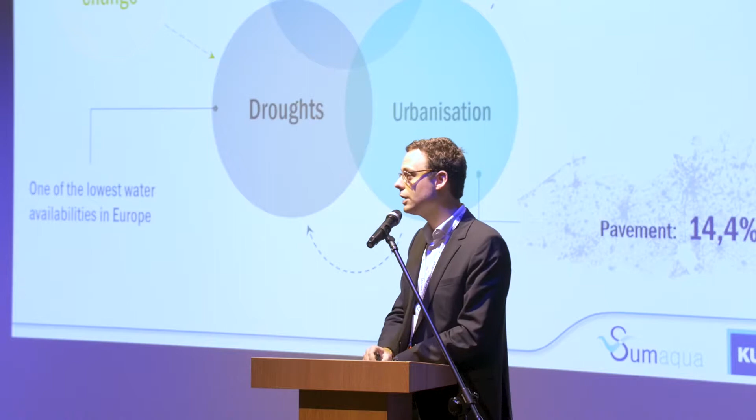And on top of that, we also have climate change, which further increases the risk of floods and droughts, of course. So we have to do something about it, and we want to build water-resilient cities in Flanders. And for this, we need to go for a lot of different strategies. We have to use adaptive infrastructure, of course.

We have to go for win-win uses of open spaces, so multifunctional buffers, smart systems, as also introduced in the previous presentations. But we also need software and decision support systems to create strategic planning. And that's where the software that we developed comes in, so Sirio and SCAN. So that's basically the framework.

So first, let's look at Sirio. Sirio is a software tool that we've developed to design climate-proof and optimal small-scale rainwater systems like buffer basins, for instance, or infiltration basins. But the unique thing about this is that it simulates long-term time series. So we're going to simulate hundreds of years of rainfall in just a few seconds. I'll explain that in a minute.

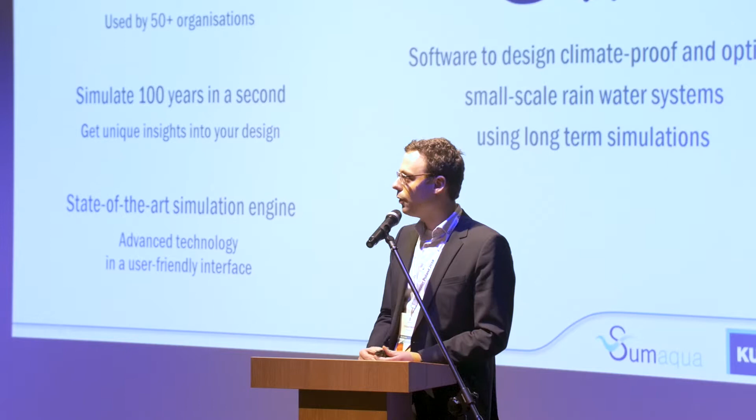So we've developed this at the university in Belgium, and in 1 year, because it's launched about a year ago now, it has become the standard tool for small-scale rainwater designs, and some companies here are in fact also using it. And as I said, the unique thing is that we can simulate 100 years of rainfall just in a second. So that's very easy to do. And then we can learn a lot from those data. We can do that because we've built a new simulation engine, which is very fast.

Now, how can we use Sirio for some practical cases? We can use it for sewer designs, for instance. So we can determine how much buffer volume we should design, how often an overflow is going to occur, and so on. But we can also use it for rainwater harvesting analysis. So that's basically reusing rainwater. And that's becoming increasingly important and also increasingly applied in Belgium.

So we can determine very precisely how much water is available and what the optimal design should be to maximize the potential water reuse. We also use it for strategic water planning, so for industries, for instance, to create some water plans, also for cities. Brussels Airport, for instance, is also using it, and for climate adaptation. So we've built several climate change scenarios into the software, so you can also simulate those. And then you can see what's going to happen in the future with your specific design.

How does it work precisely? I'll also show you an example in just one of the next slides, but I'm briefly going to go through the different steps. So the first step, you have to build your Sirio model. So you have to translate your design into some parameters in Sirio. I'm not going into technical details because that's not the point of this presentation, of course. But it's very easy to build such a model. So it's basically a reservoir type model and all the parameters are tangible, you can measure them.

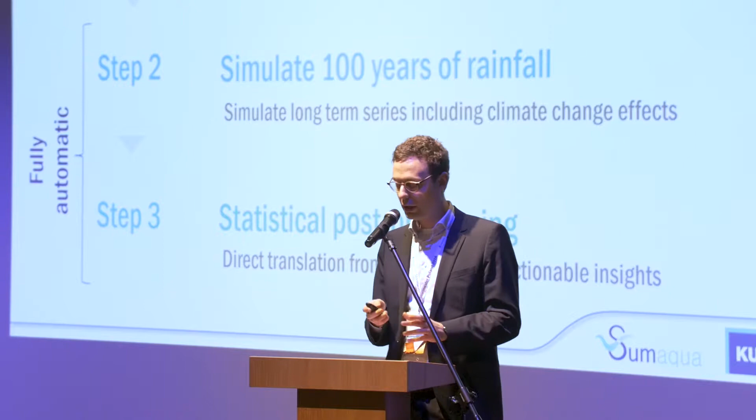So what can we learn then from Sirio? Because of these long-term simulations, we can get a lot of insights. We can look at the mass balance, for instance. So how much water is going to infiltrate, how much is going to evaporate, how much is going to reuse, and so on. All the overflow characteristics from an event that occurs 20 times a year up to an event that occurs only once every century are directly visualized. Climate change impacts are also visualized, including the uncertainty, of course, rainwater harvesting analysis, and a lot of additional information into the dynamics of your system. But I'm not going to show that.

So let's go to an example. This is a new residential zone which is currently being built in Ghent, a city in Belgium. And we received a design from a sewer company, from an engineering company basically. And the design included some infiltration ponds, green roofs, buffers, and so on. So we were asked to evaluate that design and to check whether it's sustainable or not and if it could be improved. Now, unfortunately, I cannot do a live demonstration here of the software. That's not possible in this setting, so I had to include some print screens.

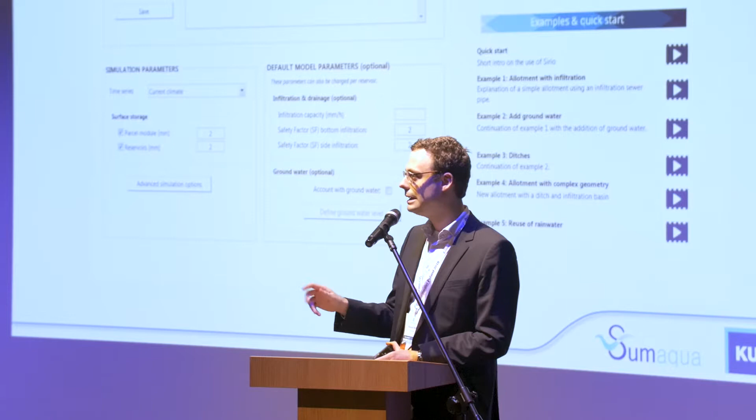So here you see the welcome screen of Sirio. It also has some instruction videos incorporated, so it's very easy to use. There are also a lot of examples available. Here you can see how we built a model. So on the left-hand side, you have the different blocks that represent your system, like a green roof, a buffer, and so on. And you can interlink them. And on the right-hand side, you have to specify the parameters. It's very intuitive to use.

Here we see some of the simulation results. There are a lot of results available in tables, graphs, in reports as well. I'm not going into detail on all these different simulation results, but I just want to highlight a few of those. To begin with, this figure here on the left bottom side shows us the mass balance, so where the water in your specific design is going to. And in this case, we saw that over the longer term, 40% of all the water in this region will infiltrate, and about 39% will be reused. So that means that 80%, if I sum the two, is going to stay there on the spot. So that's quite a sustainable design, but we could have improved it a bit further as well.

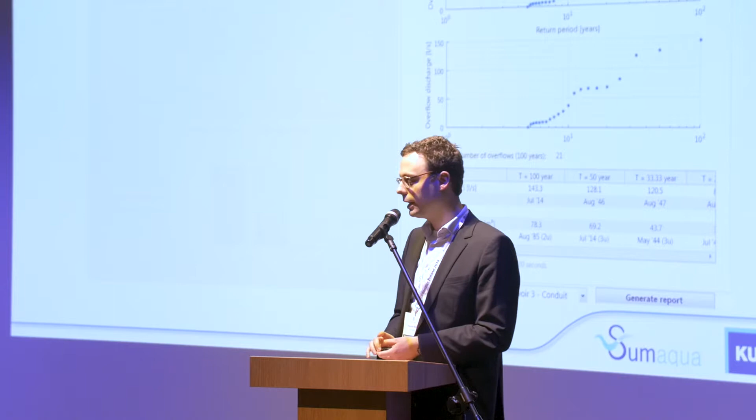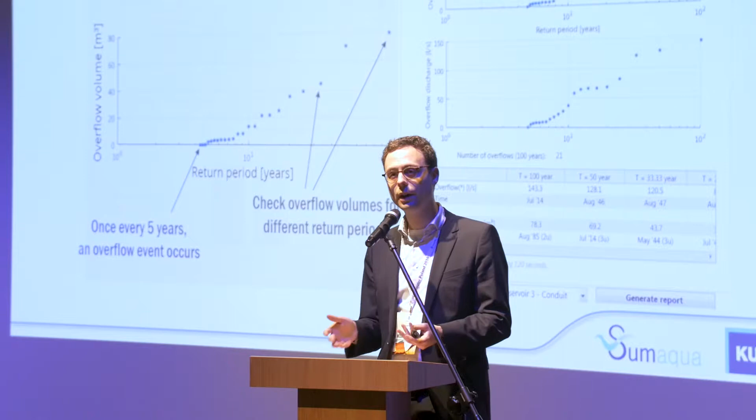Now let's look on the right-hand side. Here we have some more information. Here on this figure we see how often we will have an overflow and which volumes will occur. So that's already quite technical, but we can see here, for instance, that we will have an overflow event once every 5 years. And you can also see for higher return periods how much water precisely is going to overflow. And that's, of course, very important to determine whether such a design is good or if it's burdening the downstream system too much. So based on this, you can easily improve your designs.

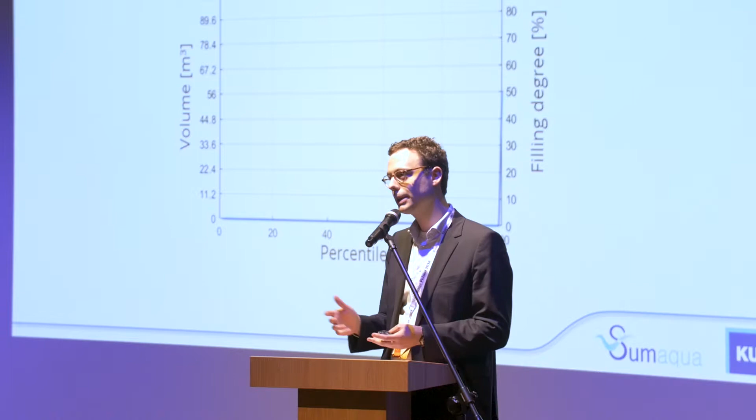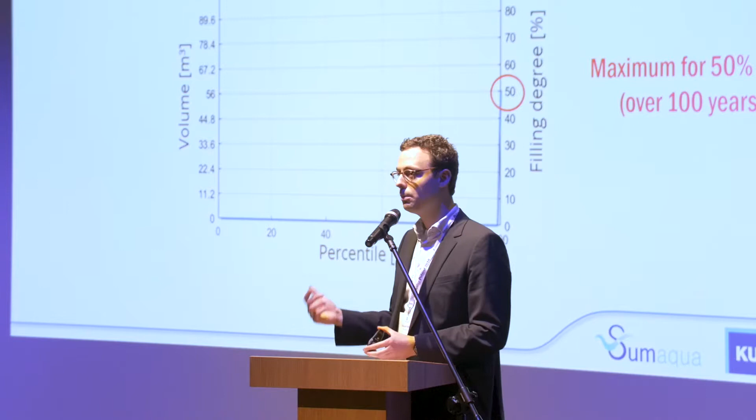And we also checked if all the buffers that were being installed were also effectively being used. And this is a result of one of the buffers. You can see here on the y-axis the filling degree, so to which percentage it is filled, versus how often it is filled. Here you can see that about 98–99% of the time the buffer will be empty, but that's also logical because it's not raining that often. But more strikingly is that this percentage is 50%, so that means that only once in a century, your buffer will be filled for 50%. So the remainder, the other 50%, is never being used. So this buffer was over-dimensioned significantly. So you can build such a model in just a few minutes, and you can easily improve your design very much. That's also why it has become the standard software so fast.

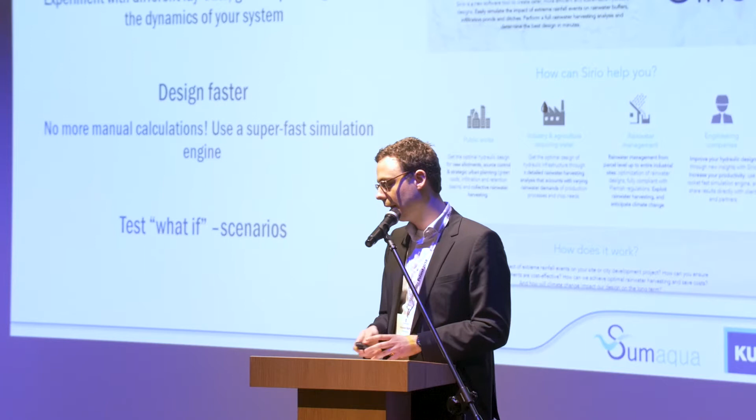So to summarize the first part about Sirio, you can easily improve your rainwater designs, you can experiment with different layouts, so you can be very creative in your design, think out of the box. You can design very fast, it just takes a few minutes. It also has a very fast simulation engine. And you can test a lot of what-if scenarios. So what if the infiltration capacity is, for instance, different from what you anticipated? How much overflows will you have in that case? And so on and so on.

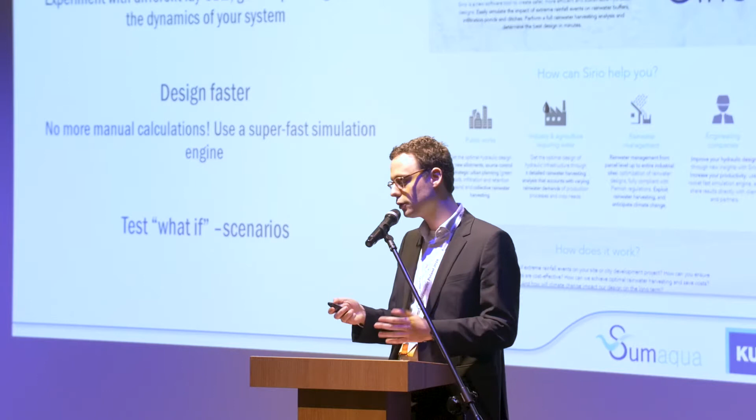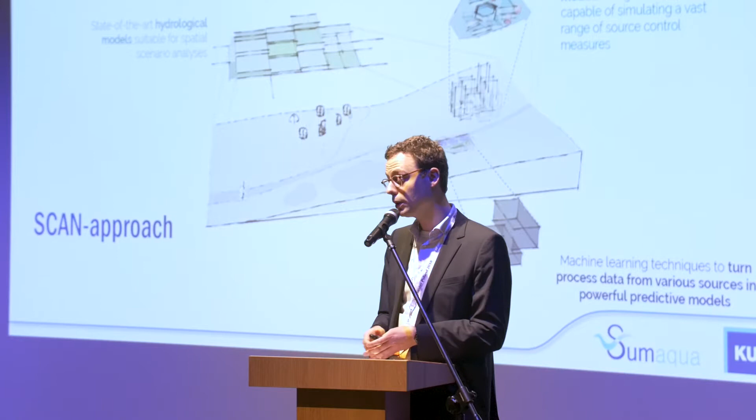Now let's go to SCAN. That's the approach in the software tool that we're currently developing. And that's looking at a much broader scale. So SCAN looks at catchment scale. It looks at rivers, hydrology, urban systems as well, wastewater treatment plants in an integrated and also multidisciplinary way. We've already developed a modeling approach that is being used. It has also been published in some scientific journals. So basically, again, we have very fast models that enable a vast range of different applications. And it also uses some artificial intelligence.

So basically, the modeling approach combines the conventional model structures with AI, machine learning techniques to get a much better estimation. And basically, these models are also self-learning. So from every rainfall event that passes, if you have some sensors in place, the model will be updated and will learn from the data that you measure. So they become more and more accurate over time as well. We've tested it in various operational settings. I'll show you some examples on the next slides.

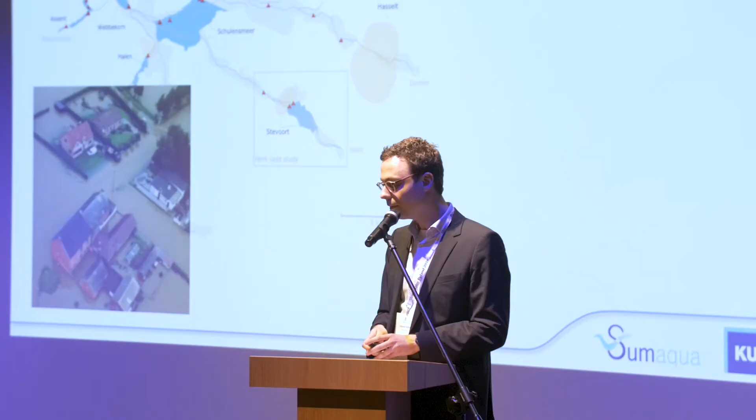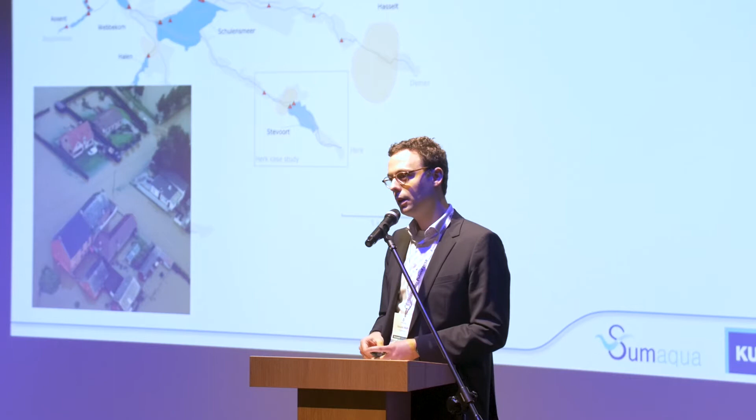It can be included in any operational monitoring system. So the first application I wanted to show is an intelligent real-time flood control system, which is currently operational in Belgium. Here we're looking at the Demer Basin in Belgium. It's a basin consisting of some quite small rivers actually, but they flood very often and they're situated in a highly urbanized area. So that means that we have a lot of flood damages almost every year.

Now, there are also a lot of controllable hydraulic infrastructures present, like this gate, for instance, which can move up and down, of course. And currently, these structures are being regulated using PLC, so that means simple rule-based controls. So it looks at water level at this location, another location, and based on that, it will determine its optimal position. But then we wanted to try, what if we link this with such an advanced model and look at forecasts as well? Can we then improve this system? So that's what we tested.

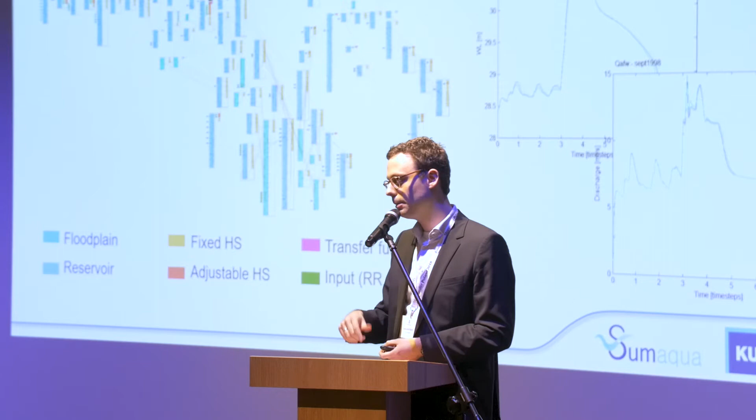So here on the left, you can see the SCAN model. This one is quite detailed. It has a bit over 1,000 calculation nodes, I think. But the main point is that it's very fast. So simulating years takes only a few seconds. It was actually calibrated to a hydrodynamic model, but hydrodynamic models cannot be used for these kind of applications because they're much too slow. And the second thing that is important is its accuracy. So on the right-hand side, you can see some graphs of simulation results and observed data, and they match almost perfectly. This is from an offline simulation.

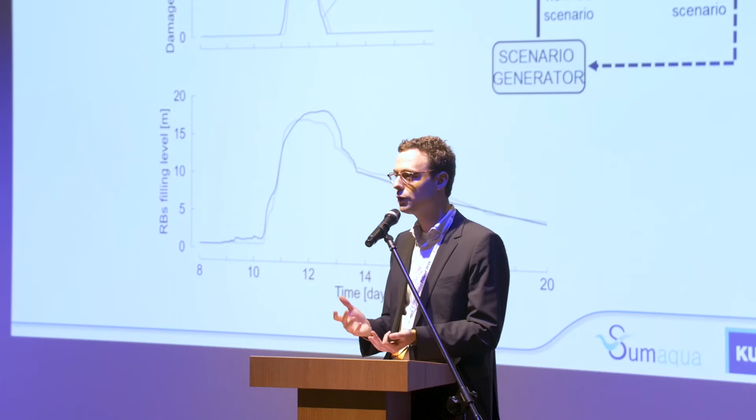So then we've built a SCAN model, and now we've linked it to some optimization algorithms to determine the best position of all the gates in our system. And we could see that it can easily improve your control structures very much. So we've simulated an event that occurred a few years ago, and that event has led to 3 million euros of damage. Now, if we apply this smart system together with the SCAN model, we could reduce the damage by 1 million euros. And the important thing is that we do not need to build any additional hydraulic infrastructure. So we just use what is present already, but in a much more efficient way.

That's how it works. The second application to conclude this presentation is the first intelligent green roof that we've built in Flanders. It's part of the BRIGAID project. That's a European Horizon 2020 project in which we're testing different innovations. We're always looking for new innovations to test, by the way. So if you have an innovation related to climate disaster resilience and you want to test it on a European scale, you can always contact us, and then we can also test your innovation. Currently, we're testing about 50 different innovations. So this green roof is one of those.

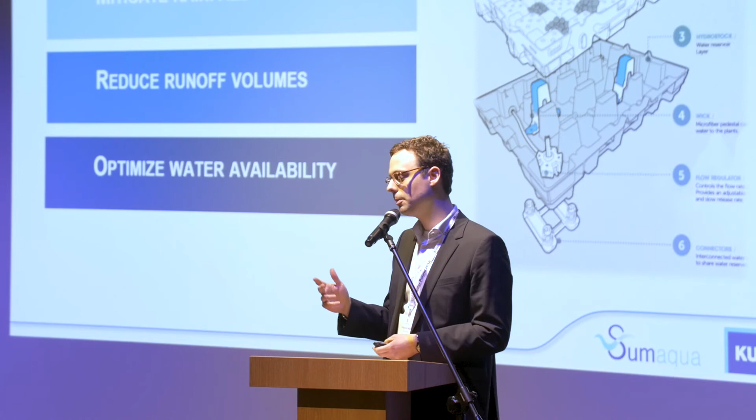Basically, it's just a conventional green roof, a regular one, with some extras. First of all, we have a storage tray at the bottom of the green roof, so we can capture water, we can control the water inside the green roof. And secondly, the outlet of this tray is also controllable remotely. So basically, in dry periods, we will try to capture as much rainwater as possible. So that means that the vegetation has much more water and will survive drier periods for a longer time. And then in the opposite, when a high intensity rainfall event is predicted, we can quickly empty this green roof so that more water space becomes available, and then we can capture the incoming rainfall event as well. So that's basically the setup.

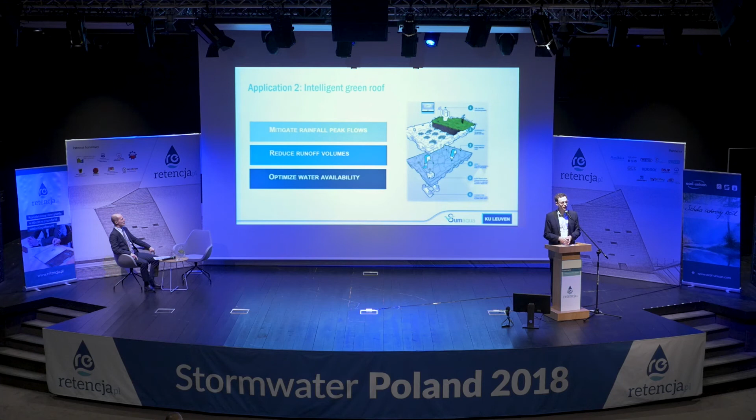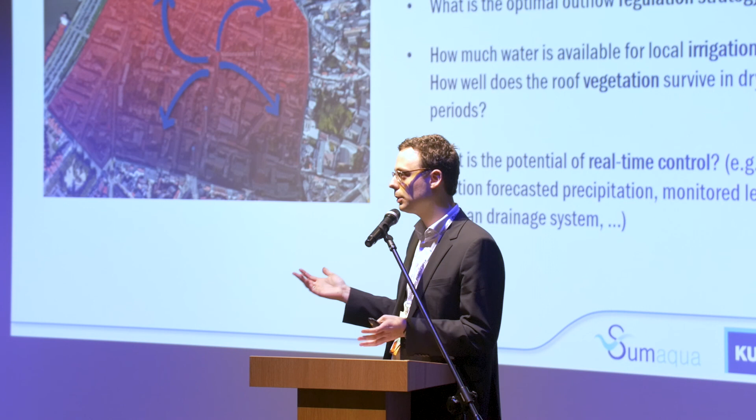So the goal is to mitigate the rainfall peak flows, to reduce the runoff volumes, and to optimize the water availability. So we've built this in the city of Antwerp in Belgium in one operational case. And this is then where SCAN comes in. Now we're going to upscale the results to the whole city. So we're going to see what happens if we would employ a lot of these intelligent green roofs across the city of Antwerp. Will it have an impact or not? So we can then check, for instance, the impact on urban floods, but also on city heat stress. We can determine the optimal outflow regulations of the green roof using SCAN, and so on and so forth. So basically, these were two applications of the SCAN platform, which is currently under development.